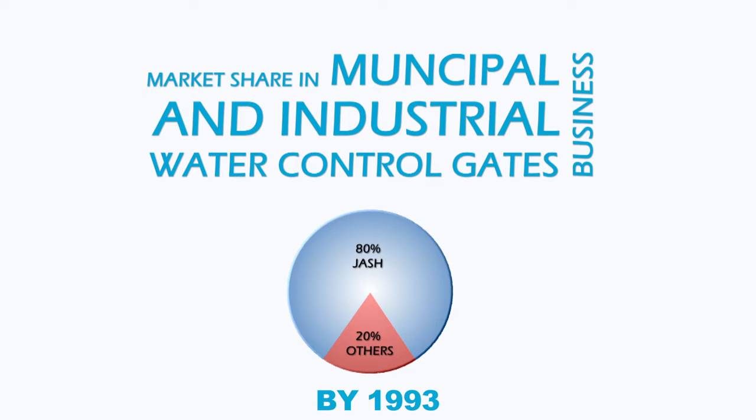This dominant position resulted in a very high awareness of Jash as a brand name, and to capitalize on this, Jash decided to diversify its product portfolio. With this aim, Jash entered into collaboration with Schutte Group of Germany to offer a wide range of valves for the liquid and bulk solids industry.

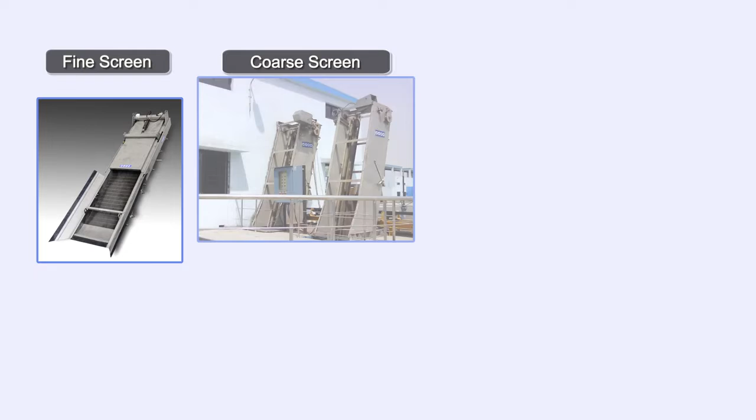In the year 2000, Jash joined hands with Holland Group of Norway to manufacture fine and coarse screening equipment. In the year 2007, Jash entered into collaboration with Weco Armature in Germany to manufacture its range of mono-knife gate valves.

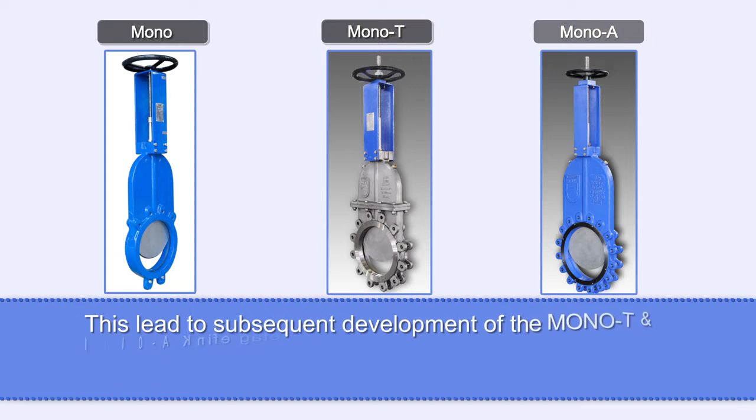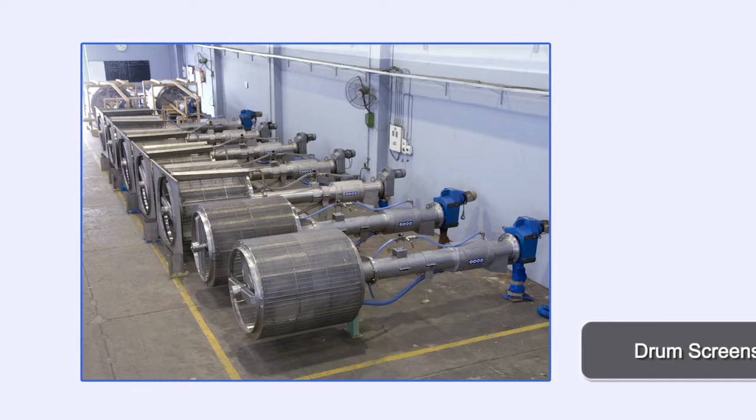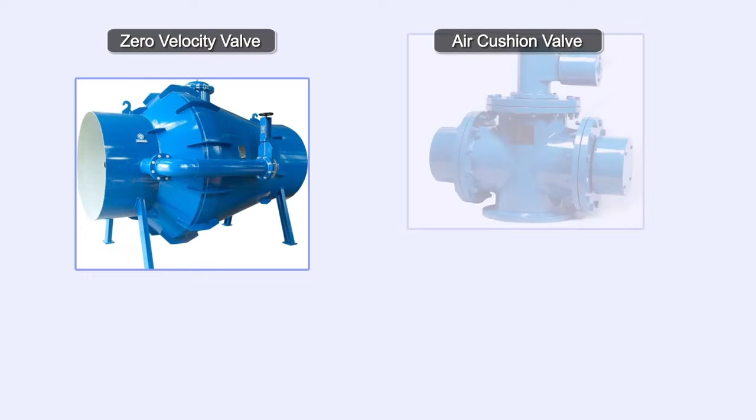Jash simultaneously developed a wide range of other screening products indigenously to meet varied applications of the industry. In the year 2009, Jash acquired SureSeal, a dominant player in the Indian market for water hammer control valves for long-distance cross-country pumped rising mains. In the year 2010, Jash set up a wholly owned subsidiary in USA to cater to the American market.

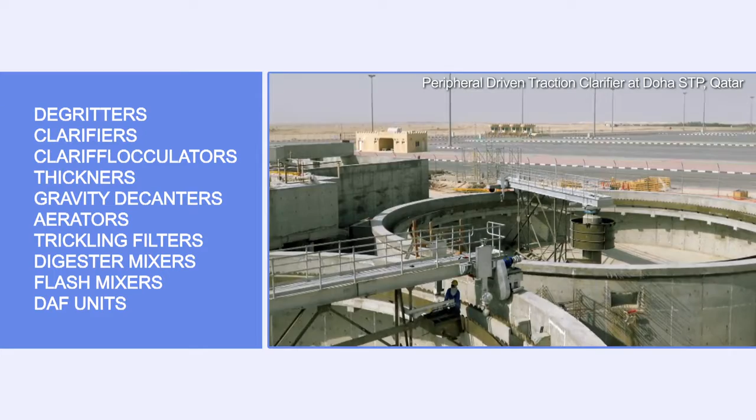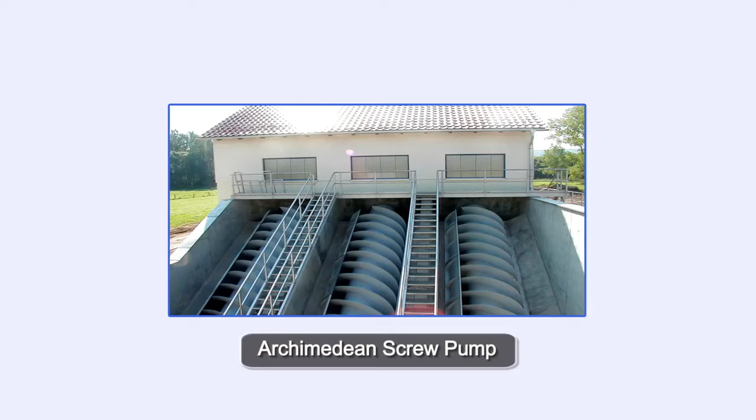Jash subsequently acquired Shivpath Engineers Private Limited, Chennai, a well-known manufacturer of process equipment in the water industry. This acquisition enabled Jash to offer primary treatment equipment along with gates, screens and valves. In November 2011, Jash tied up with Rehart, Germany to manufacture Archimedean screw pumps for stormwater and wastewater pumping, and hydropower screw turbines for power generation at low water heads.

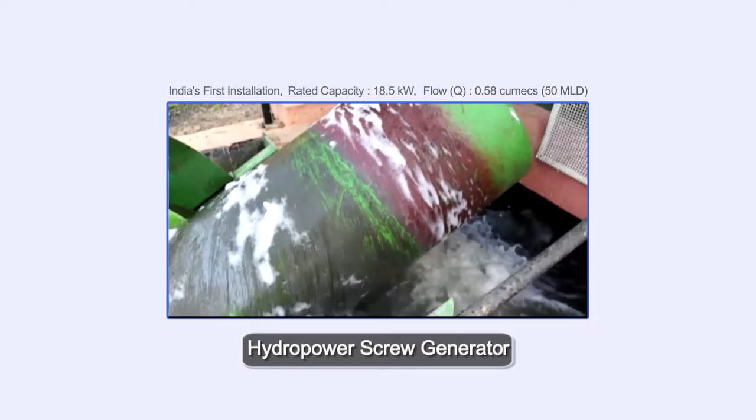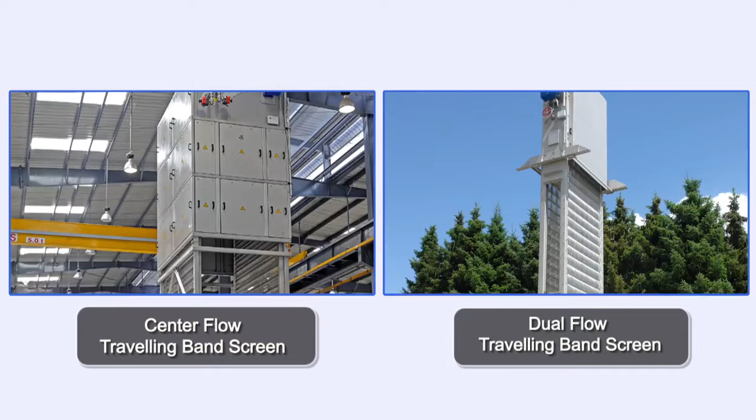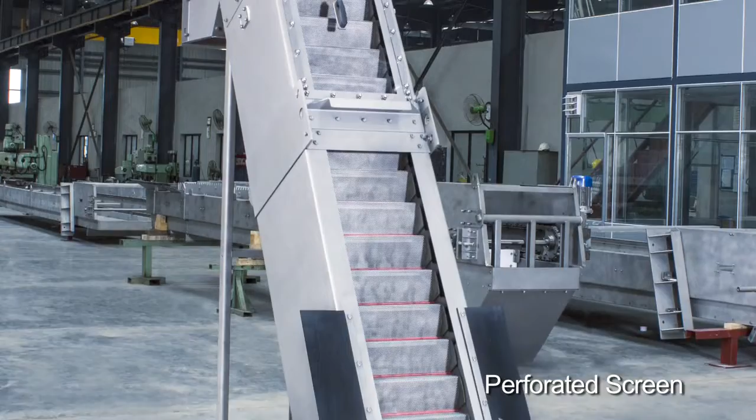To meet the requirements of raw water intake and sea water intake business, Josh joined hands with FSM Germany in 2012 to offer their product range of traveling band screens. Simultaneously, Josh entered into technical collaboration with Maher Maschinenbau, Austria, to manufacture its multi-raking screen and perforated screen. The close and successful tie-up with Maher Maschinenbau ultimately led to the acquisition of Maher Maschinenbau, Austria, and Engineering and Manufacturing, Hong Kong by Josh in September 2014.

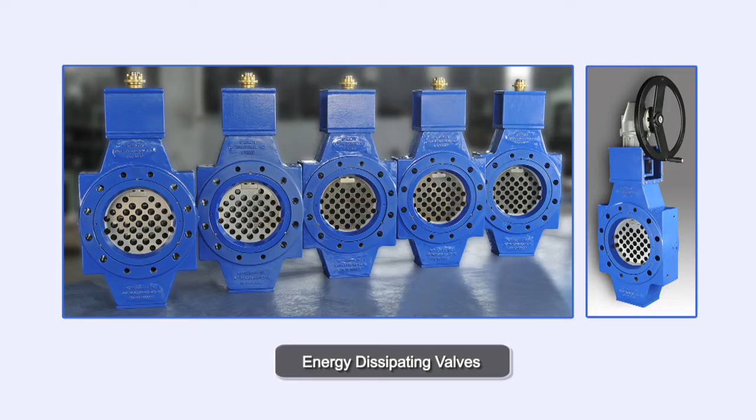To strengthen the specialty valves business, Josh finally tied up with Stealth Valves of Canada to offer its range of energy-dissipating valves. These collaborations and acquisitions have made Josh a leading supplier in the water and wastewater equipment business, enabling it to supply its range of products to more than 35 countries worldwide. In many of these countries, Josh is a major supplier with a dominant market share.

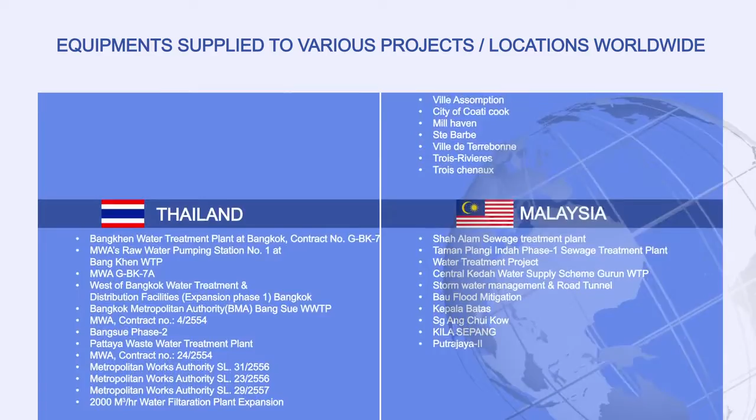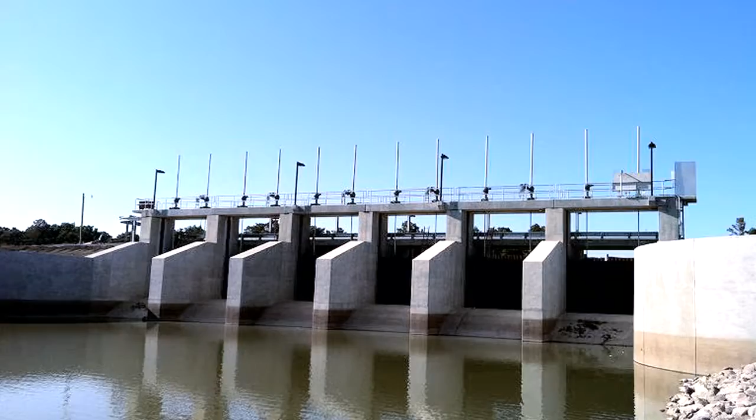Today, with offices in India, USA, Austria and Hong Kong, Josh is geared to serve the needs of its clients in major parts of the world and aims to become a leading supplier of its equipment worldwide.

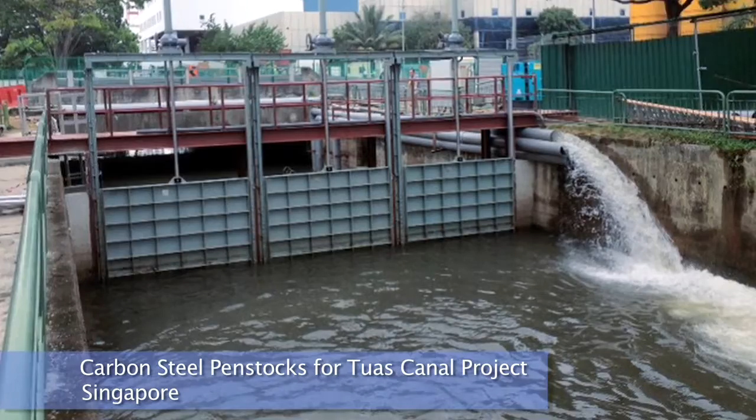Josh is an ISO 9001 approved company and many of its products are CE certified. Josh is amongst the few companies worldwide to obtain NSF certification for stainless steel gates and conduct a 25,000 cycle accelerated seat wear test for verifying sealing performance. Josh has invested in a modern office infrastructure to cater to all its manpower needs till year 2018.

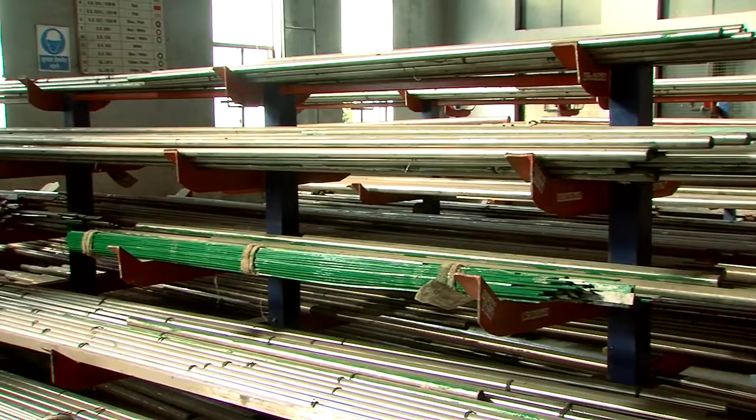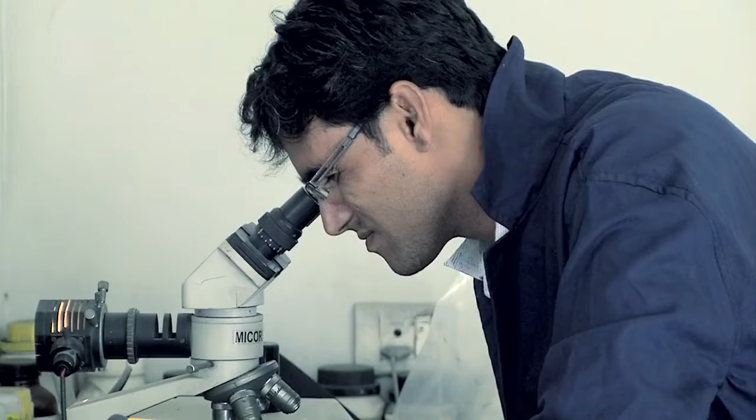The cast products plant has all essential facilities in-house. The stores plant has proper storage facility and a positive material identification instrument to re-verify chemical composition of every incoming material. The foundry shop is geared to make hand-molded grey iron castings weighing up to 18 tons and has a fully equipped quality control laboratory. The cast iron gates plant has its own infrastructure for machining, assembly, testing and painting.

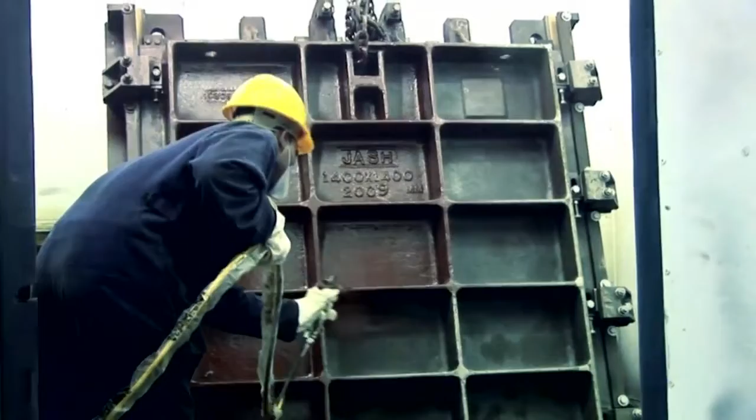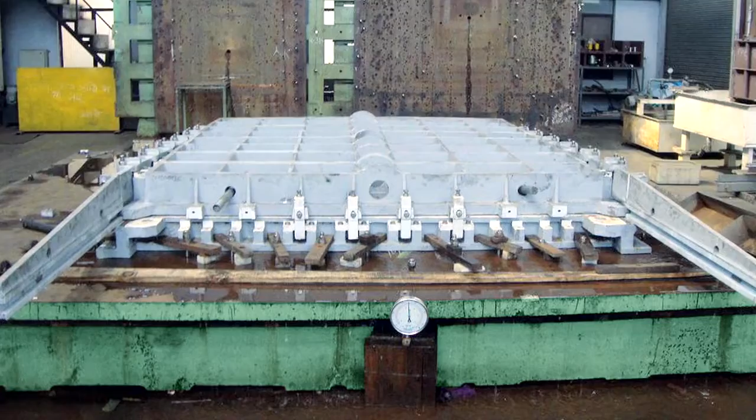The gates plant has a hydrostatic testing facility that can be used to conduct leakage tests of gates up to 3500 by 5000 mm size and hydrostatic loads up to 250 tons. The largest cast iron gate manufactured till date is of 3200 by 4500 mm size, weighing over 22 tons.

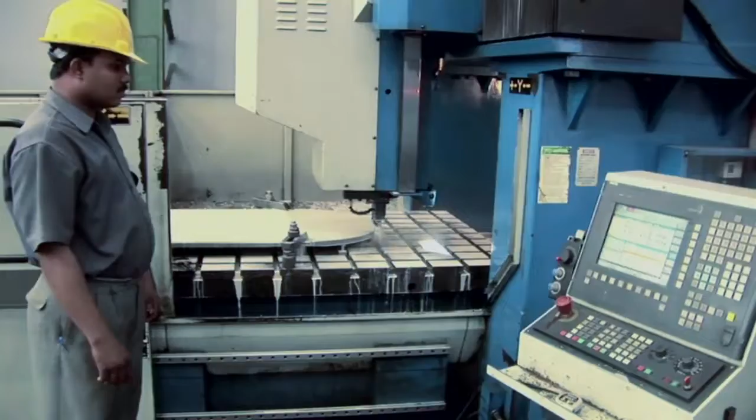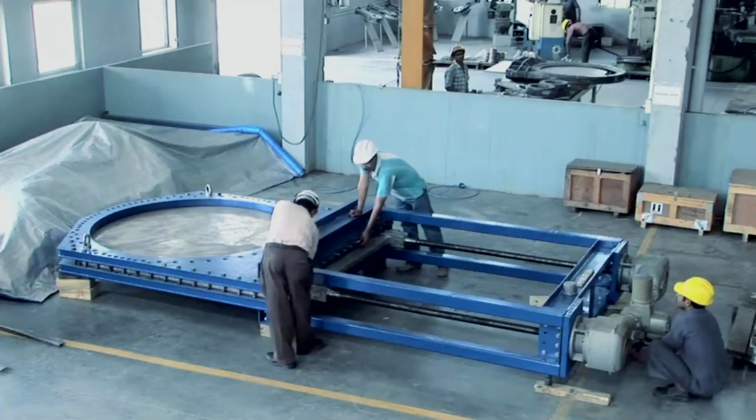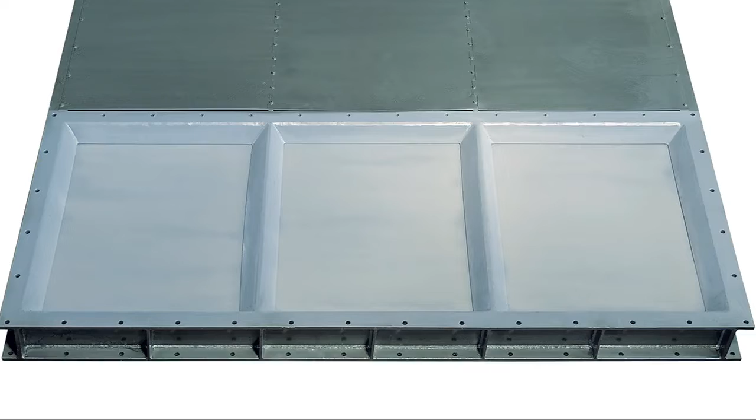The valve plant is fully equipped to meet all the critical manufacturing requirements of knife gate valves and bulk solids handling valves. This plant can manufacture valves up to 3000 mm size. The largest valve manufactured till date is of 2000 mm size in cast steel construction, 1600 mm dia in super duplex construction and 2510 by 1050 mm size in fabricated construction.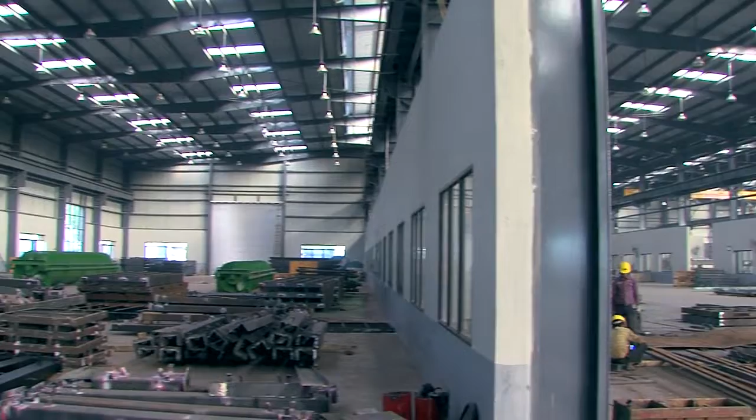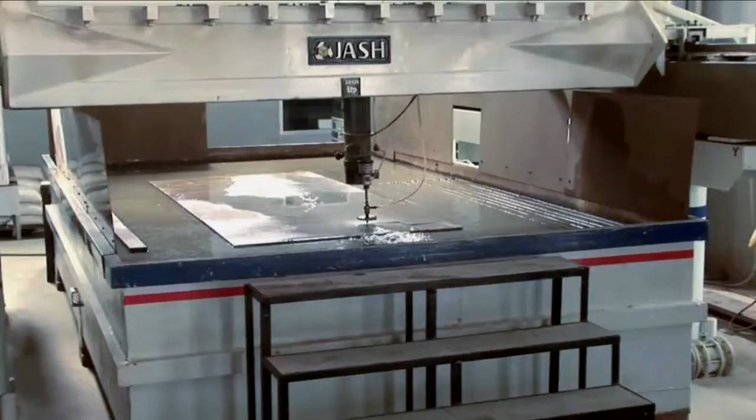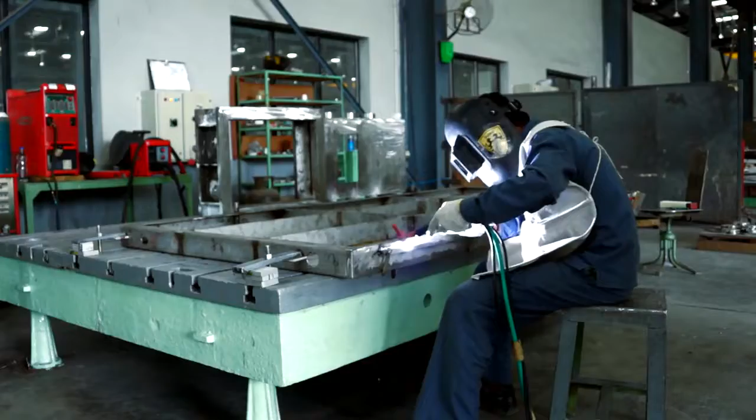The fabricated products plant is equipped with diversified machinery for manufacturing of fabricated products. It has facility to shear and bend plates up to 16 mm thickness and profile cutting of plates up to 40 mm thickness using a heatless CNC water jet cutting machine. TIG, MIG and arc welding processes are carried out using qualified processes and welders in line with ASME Section 9.

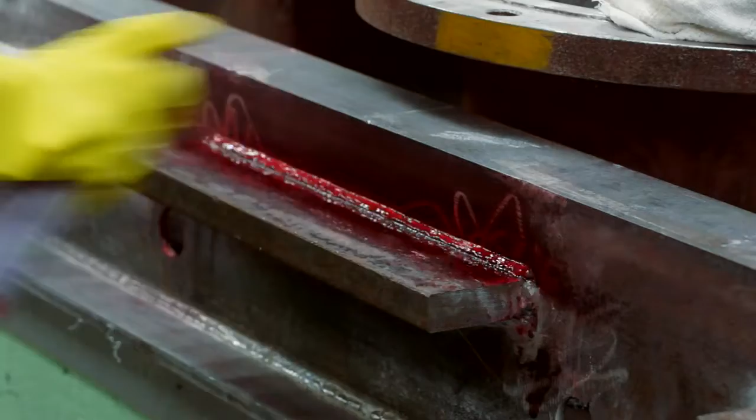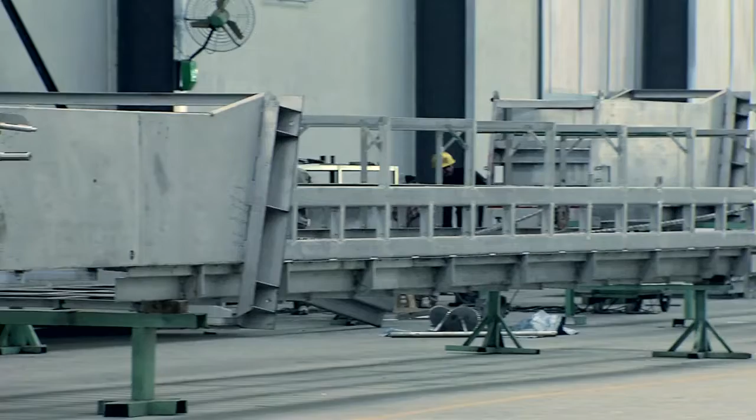After welding, all weld joints are tested for cracks using dye penetrant and magnetic particle inspection. To prevent intergranular and crevice corrosion, all submerged joints are continuously welded. The assembly of stainless steel products is done in a clean area free of ferrous contamination and has facility for stainless steel shot blasting, bath pickling and passivation.

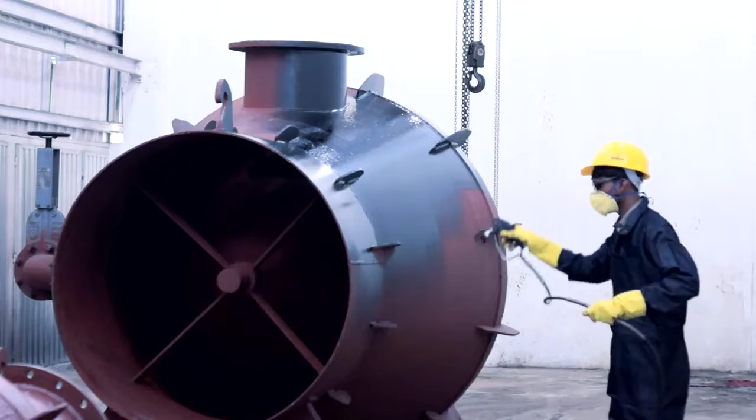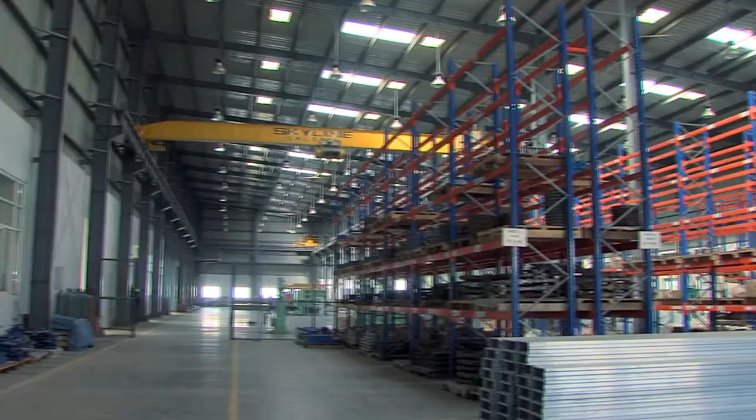The carbon steel products plant has facility to handle jobs weighing 30 tons and conduct shot blasting and painting of products as large as 5 meters wide and 20 meters long. The SEZ plant caters exclusively to export business and is equipped with complete infrastructure required for manufacture of stainless steel gates and various valves for the export market.

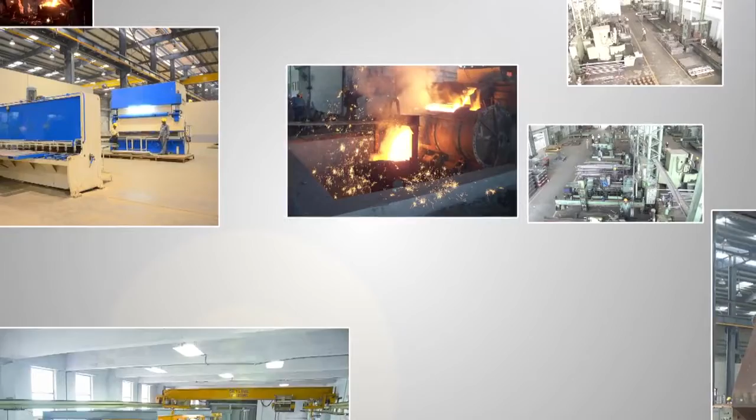Jash is amongst the very few companies in this line of business to have invested in such comprehensive manufacturing facilities. This manufacturing strength, along with a well-diversified product portfolio, has enabled Jash to become a reliable partner for various companies worldwide.

Our vision is to lead the industry and command respect for ourselves and our stakeholders through growth, innovation, and customer focus. We shall realize this vision by having clear core values which define us and our work.